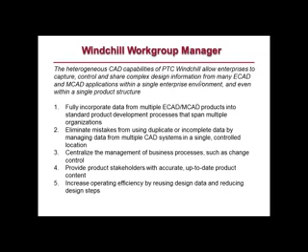Windchill by default manages Creo Parametric data effectively, and to manage any other CAD data, it manages through the Windchill Workgroup Manager. What it helps us do is manage the CAD functionalities in terms of parts, assemblies, drawings, configurations, attributes, relationships between parts and assemblies, relationships between parts, assemblies, drawings, and all that in a very seamless nature. Windchill understands that the core backbone of a PLM system is its integration with CAD. So PTC treats its Windchill Workgroup Manager R&D very seriously, and that is why we have seen a lot of improvements in recent years with respect to Workgroup Manager.

So let's understand what are all the products that we basically manage inside Windchill. We manage Creo Parametric, which is our flagship MCAD solution. We manage AutoCAD, Autodesk Inventor, Solidworks, NX, CATIA V5, and also FORAN. FORAN is basically a shipbuilding software, so Windchill's shipbuilding application helps us manage FORAN as a product as well.

Apart from MCAD, we also manage ECAD products like Cadence and Mentor Graphics in its various flavors like PCB design, etc. Apart from that, we also manage some direct modeling softwares like Creo Elements Pro, Creo Elements Direct for modeling and drafting. That is also seamlessly managed inside Windchill.

So let's now get on to the general best practices with multi-CAD data management with Windchill. These are general best practices which are common for all CAD tools, especially SolidWorks, Inventor, AutoCAD. So let's first look at the first thing that I'm going to show you.

We all know that Windchill helps users to create soft types. A soft type is basically the one that you create to differentiate the business object with respect to your business process. For example, in documents, you can have soft types like presentation documents, analysis documents, test documents, and you can have attributes for that. But what happened in 10.0 was Windchill extended soft types even for CAD documents.

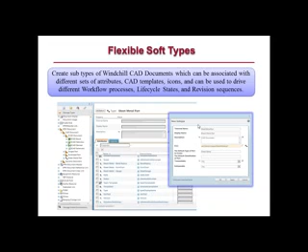For example, the name of the subtype is sheet metal part. So if you have that as the value of that particular attribute, then when the CAD document gets checked in, Windchill understands that this belongs to this particular soft type, and it can link it automatically, and the attributes all get populated accordingly. So that's a very important tip or best practice that I would like customers to adopt in order to ensure their engineering process is captured correctly.

So let me go on to the next one. This is again something that I have seen overlooked by users at times. Normally what we do is when we create a CAD document, we go to the CAD system and say file new, hit the command, and automatically a new CAD part or assembly opens, and then we go about creating it and check it in.

Eventually what we are missing here is we are not using the templates properly. Now there might be a question: no, I use my templates. But then the templates that you use are basically from the local system. You might never know that the template would have been changed in Windchill by your administrator because of some standard organizational practices that was in place.

So the key suggestion I'm trying to make here is using the user interface for creating a new CAD document within the workspace. What you get out of it: first, you use the correct template managed inside Windchill. Second, we can go and fill in the attributes for that specific CAD document type before even we create the CAD document, so you don't need to painstakingly go back to attributes and create them when you check in.

Third, we can ensure that auto numbering is properly used, because till 10.1 in Windchill, if we have to enable auto numbering and ensure that users use it effectively, this is the only method. Because when you do file new CAD document inside SolidWorks or Inventor in 10.1, the auto numbering is not going to be enforced - it's going to basically throw a number at random.

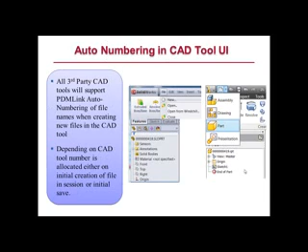Okay, so now let's look at the integrations specific with SolidWorks initially, apart from the general ones we saw before. The first one is SolidWorks support for ToolBox. Now it's basically a myth that we all have - I've seen a lot of users telling me that SolidWorks Toolbox is not effectively managed inside Windchill. But over the years, Windchill has matured to ensure that SolidWorks Toolbox parts are effectively managed inside Windchill.

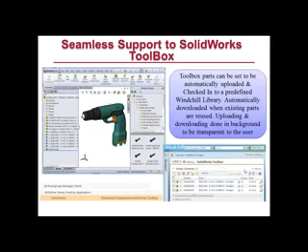It supports them seamlessly, and we are now going to see a quick demonstration of how SolidWorks Toolbox parts could be managed inside Windchill. So let me quickly show you in SolidWorks. I have SolidWorks open, I also have my Workgroup Manager on. I have 10.2 here, actually speaking. So let me first quickly go to File New.

I'm going to create a part now, an assembly. Let's also see one of the other things I was trying to tell you. So when I say File New Assembly - this is not a best practice, but I want to demonstrate this to show you the auto numbering that is new with Windchill 10.2. If you could see here, I said File New Assembly, but the auto numbering is automatically being put in place, and I'm getting a number as per the Windchill numbering scheme that I had. So that's something newly come up in 10.2.

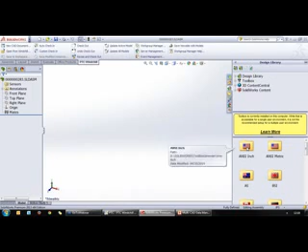So now let me go up and add a toolbox part. Let me access my design library - I have my toolbox set here, and I'm going to select a toolbox part. But before I do this, before I go and select a toolbox part, what I'm going to do is access Windchill through my web browser first.

I'm going to sign in as somebody called Pat, and I'm going to show you the place where I have configured my toolbox parts to get checked in automatically. So let me go to browse - I'm picking my libraries.

So I have a folder here called SolidWorks Toolbox, and as you can see, there are already 3 parts checked in. The most interesting thing is it shows with the related SolidWorks icon, a toolbox part. That means Windchill understands that this is a toolbox part, so that's why it's available here.

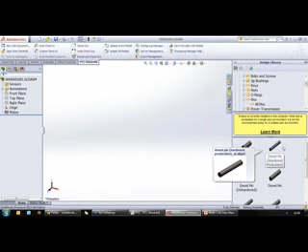So let me now check in another toolbox part. Let me access toolbox and browse down. Let me pick up a pin. I know for sure that this pin is not going to be the first part in any assembly, but this is only for example's sake, so please pardon me for not following the right process of assembling. Pin should always be there once components are assembled, but that's fine. We're trying to see how toolbox could be managed inside Windchill.

Now as I do this, this is something very, very interesting. I did not press save, I did not do a check-in, I did not do anything with respect to Windchill operation. All I did is pick up a toolbox part and assemble it. Now what has happened is Windchill has identified that there's a toolbox part assembled, and went ahead and checked in that file straight into my library folder.

So if I refresh this, you would know that the part I just brought in is available here. It has checked in automatically, and it has not waited for the user, it has not waited till we check in the assembly. The toolbox part straight away goes into Windchill. This means that whenever you're going to use the same toolbox part elsewhere, it will reuse this, and it will ensure that we always have those parts inside the library.

So this is how Windchill manages toolbox parts effectively in SolidWorks. We also can have attributes mapped to toolbox, and then ensure that even the attributes that you have for the toolbox part go into Windchill and stay in there. So a very quick example of how toolbox gets effectively managed inside Windchill. Let me quickly go to the next slide.

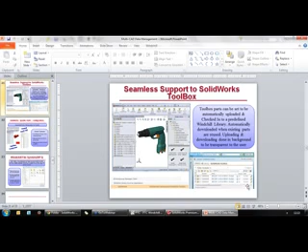Another interesting thing: SolidWorks has configurations, which is similar to a family table in Creo or in Windchill. Configurations is nothing but a derived instance of the generic part where you're going to have smaller design modifications, and then you're going to have form this as a part of your assembly, which comprises a design table.

So majority of us know that SolidWorks configurations could be managed inside Windchill, but there is an interesting piece of information I'd like to share. There are people who might think that they need to write an attribute inside the configuration to drive the configuration in Windchill — in other words, you need an attribute for the configuration called PTC_IS_INSTANCE, and depending on the value of that attribute, the configuration would be exposed in Windchill. That's the general consensus among people, but actually, we can drive this through a preference, and we do not need the attribute to be present inside the configuration file to do this.

That means I can basically have a preference called manage model instances as family table, and another preference called manage new model instances by default, both set to yes, so that SolidWorks configurations get automatically checked in with the generic in Windchill. Another interesting thing with respect to SolidWorks configurations is this auto generate family instance number — meaning a configuration can also get automatically numbered as per our Windchill numbering scheme, and it will not take user defined value if the preference is set to yes.

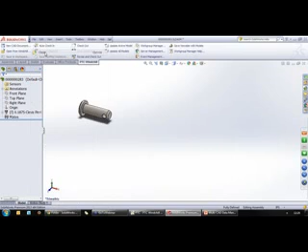So let me do that now for you. Let me close this toolbox, and let me create new — this time I'm going to create a part. I can still use the new CAD through the HTML UI, but let's do this method right now because I don't have any subtypes, so this is fine. So I'm going to quickly create an extruded boss.

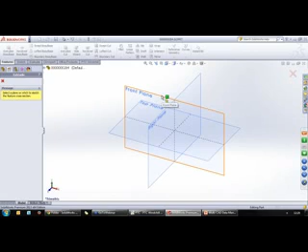So this is a part I've created, and I'm now going to create a configuration for this. Now, if you could see here, automatically this has been named as 285 now — this was 284 and this is 285. That means the configuration also gets automatically numbered as per the scheme that we have.

So let me activate, let me make this as 1. And let me change this to be 3, or 5 rather.

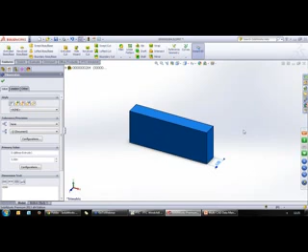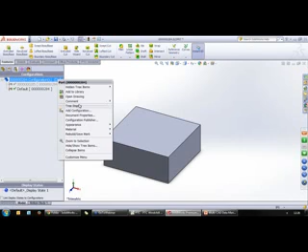Okay, so I have a configuration which is a thinner block, and a default which is slightly thicker. Now I'm going to check in both. I have no preferences set, no attributes set. If you could see the properties of this file, I don't have any PTC_IS_INSTANCE value kept in, so my properties are completely empty.

But I will be able to now check in this configuration as well. Before I do that, I'm going to show you this quick user interface that has come up with 10.2. Very interesting one - you have a ribbon called PTC Windchill now, which will help you check in, check out, and revise files easily.

Another interesting thing which is not in the presentation, but I want to tell you, is this one. Sometimes your worker has failed, or you do not have a worker to create viewables for SolidWorks files. You can now use this functionality to create viewables on save - you create viewables as you check in the file, so you don't need to depend on a worker. That's something introduced with 10.2.

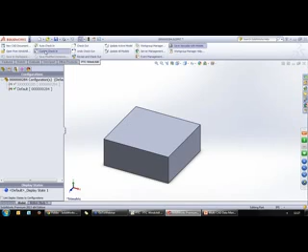So I can use this, and I'm going to check in the file. Let me use a custom check-in. A custom check-in is going to help us identify the files that we're going to check in. It's pretty evident that I'm going to take my instance along, so both are going to get checked in. Let me automatically associate it with the CAD, with the WT parts, and I'm going to complete this operation.

So this is another interesting thing that's come up, where you have a status coming in when you upload a file. When you have a larger file, you know when the file is going to get checked in. So let me go back to home to see the file.

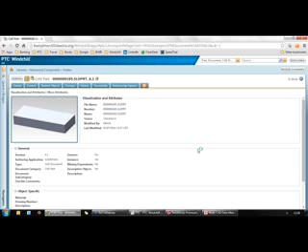Interesting thing - if you could see here, the thumbnail as well as the visualization viewable has been created. I don't have a worker basically defined for it. There is no server-side visualization created. This was a client-side viewable that's created, and that's what you're seeing here. This is a very, very interesting thing that's come up with 10.2.

So you could use this to greater effect in case you have a very, very busy worker, or in case your worker machine is currently not available.

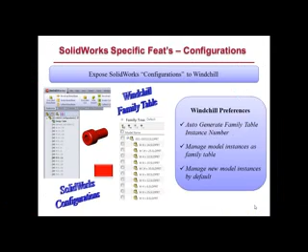Okay, so next is a very interesting thing that's come up with 10.2. This is again a 10.2 enhancement. This is something PTC is - it's an experimental venture which is now available only with SolidWorks, but I'm sure they're going to release it for other CAD tools at a later point of time.

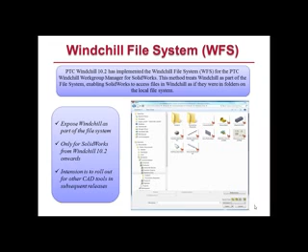Basically, in 10.1 or previous versions of Windchill, we cannot directly access the workspace as a user and pull in files as required. We might need to access the workspace through the Workgroup Manager UI, and then probably take a file from there and assemble it in an assembly, or open the file and make changes to it. But what they have done with Windchill 10.2 is made this an open file system, so that users can directly interact with it from the CAD UI and then reuse the files or make changes to the files.

It goes on like this. So if you go to SolidWorks and hit an open option, if you're integrated with Windchill, you get to these two icons, which was there only with Creo before. So when you say workspace, you're going to see the workspace items very clearly. This was not there before in 10.1 - you will not get these common space and workspace options.

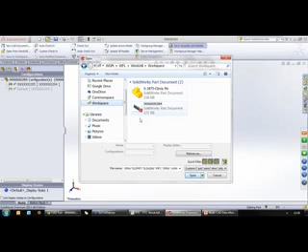You might need to say open from Windchill, access the Workgroup Manager and see this, but this is now available in SolidWorks UI itself. And you have a common space thing which is going to directly take you to the common space. If you see, the SolidWorks open UI is remaining constant - you have your reference, quick filters and all that. And then you can go to products, pick a product here, pick a drawing, and directly open it.

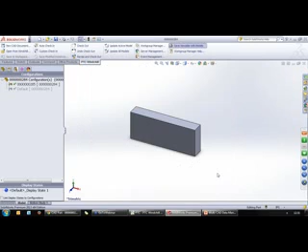So I'm not trying - you can also use your general SolidWorks modes and all that. So you have a SolidWorks open UI with which you can access Windchill for documents directly, and you don't need to depend on a Windchill Workgroup Manager open UI. That's the basic concept of a Windchill file system, a very interesting one, currently available only with SolidWorks, but I'm sure they're going to extend this to other CAD systems as well.

So that's about SolidWorks. There are lots of other smaller enhancements that have come up with SolidWorks integration, and other smaller tips and tricks that are available. But I felt that these four are the more important ones that would help customers save a lot of their time, also ensure that they follow engineering best practices to create models in Windchill.

So let's also see some newer enhancements that's there with respect to Inventor in 10.2 and some general best practices as well.

This is basically a best practice, and also a message we're trying to share: content center support is now available with Inventor and Windchill. That means, like SolidWorks and ToolBox, Inventor's native library system, called content center support, is now seamlessly integrated with Windchill. Users just need to set a preference ensuring the content center system is integrated with Windchill, and specify the library context in which files need to be uploaded. Then when they use those files inside Inventor assemblies, those files get silently uploaded into that specific library location, exactly like how I demonstrated with ToolBox. The only difference is the naming: in SolidWorks it's called ToolBox, here it's called content center support. This is something users can take cue from.

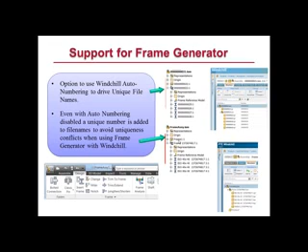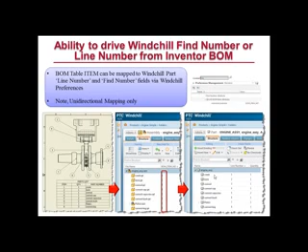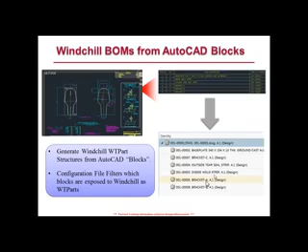Apart from that, AutoCAD Electrical is also now supported in 10.2. AutoCAD Electrical projects are supported inside 10.2, which is very important for customers to know with respect to 10.2. So we've come to the end of today's webcast, where we basically talked about how Windchill is evolving in terms of seamless tight integration with CAD tools.

When we started at 10, most of the CAD options were available only in the Workgroup Manager with respect to integration, and we had to always go back to the Workgroup Manager. But now we are talking about Windchill options available inside the CAD system itself, for example, auto numbering, new CAD creation option, or basically even the save viewables with models, which is basically a client-side worker.

So we are closely nearing to what support we have with respect to Creo Parametric. We also have support to native CAD libraries called ToolBox, Content Center, and so on. And we also are moving towards a phase where, apart from your normal viewables, we could also give output formats

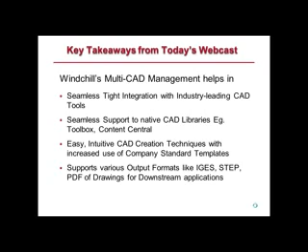like IGES, STEP, and PDF, which could be used for downstream applications. So these are the takeaways from today's webcast, and please feel free to ask me questions, and I'll be able to answer you. Over to you, Matt.

Thank you, Sri. Very nice presentation.